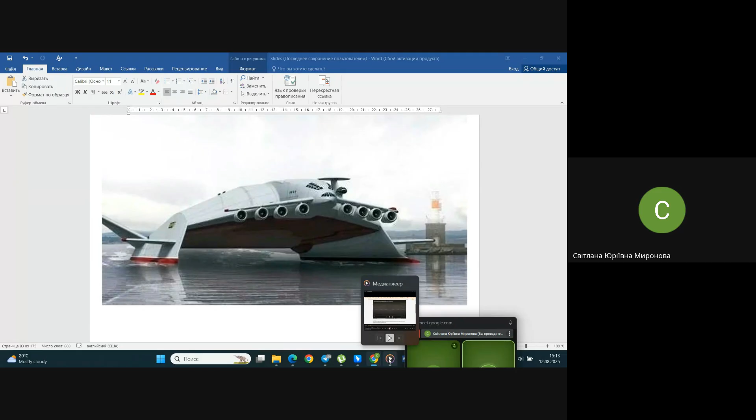That will be the video about an event in America. This event happened in 2019, 5 years ago approximately. I hope it will work properly, and maybe I need to reduce the sound. I haven't found it with English subtitles, do forgive me. It's a BBC site, and I didn't know how to copy this video, so I just saved the screen altogether.

What do we see right now? It's called Stratolaunch airplane. You see a twin body airplane with 6 engines, normal twin fuselages it seems, but a very long center wing, a very long place between these twin fuselages.

What is weird - maybe it's made on some purpose. And what they do in this video is compare it with the Mriya. Mriya is the Antonov 225 airplane. Remind you, by now it's already almost 3.5 years that it does not exist, because the only copy was destroyed not far from Kiev. It was produced in the Soviet Union in 1.5 amount, let's say - because one was produced and been in use, but another one was about to finish when the Soviet Union disappeared, and after this the project was continued sometimes. Ukraine tried to finish this airplane, but really it wasn't finished.

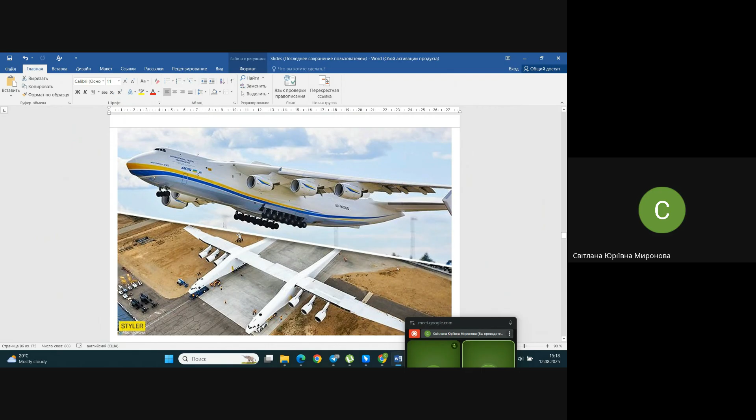Also, that is an American project, you understand - that is a Soviet project, that is an American project. And also I met sometimes one interesting concept, rather similar to Mriya, but it's not Mriya. It's the American C5 Galaxy twin body, and now it becomes obvious why they need this wide span, wide center wing between two bodies, between two fuselages.

Moreover, if we try to find something on the internet like C5 twin body - do forgive me, where is it? Here is, maybe.

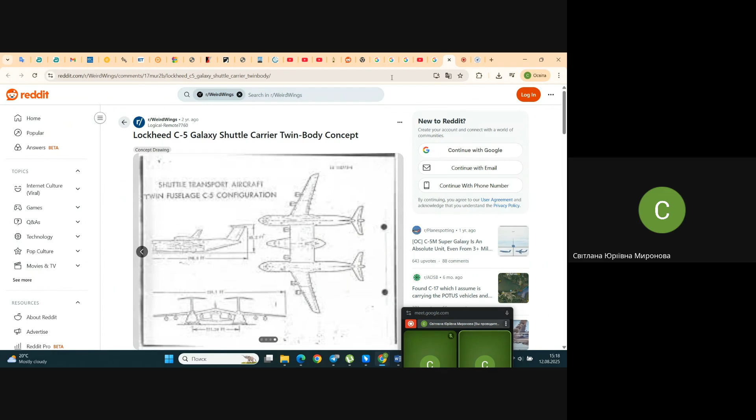Yes, C5 twin body. We will meet not only this concept. It appeared that Lockheed has developed some concepts, and one of these was rather similar to Mria. None of them was realized, and now it's obvious what they were meant to be used for.

Actually, such airplanes, such heavy machines, are necessary not even for transportation of cargoes. They are considered at times like flying airfields, and of course for their capacity to carry high values of cargo, because they are high-lifting airplanes.

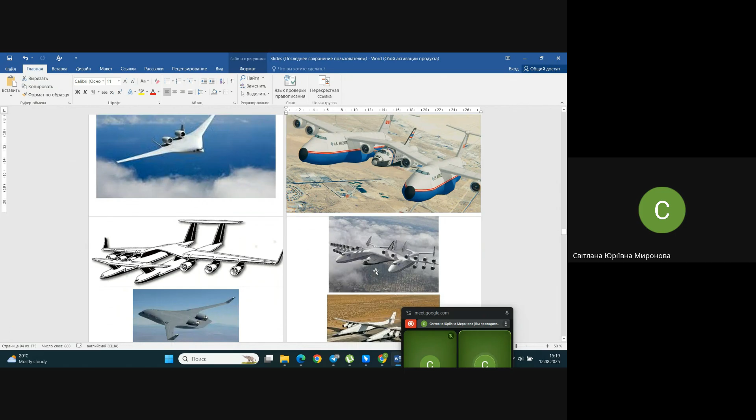Once again, the Mria project was realized in the Soviet Union. About 20 years later, the Stratolaunch was realized. To be frank, each time I watch the Stratolaunch airplane I have the feeling I've seen it already somewhere. I found this when I was watching it for the first time, 5 or 6 years ago.

In our old textbook, I found it. What do you see at the top? Look at this, look at that. It's not the same, certainly, because this one has a tandem stabilizer. It's not quite the same appearance of fuselage. It's another project. But what is this project?

Actually, that is the project from 20 years before Stratolaunch. It's called Molnia 1000, or Heracle, or Hercules in Greek and Latin — not transcription, but translation. Greek to Latin, Hercules and Heracle are the same mythological hero. And Molnia means lightning in our language.

This project, very similar to the Stratolaunch spaceship, was also designed for transportation of heavy vehicles. What you see on this side is not realistic at all — it's neither our Heracle nor the American Galaxy twin body. It's something unbelievable, with a good dozen engines.

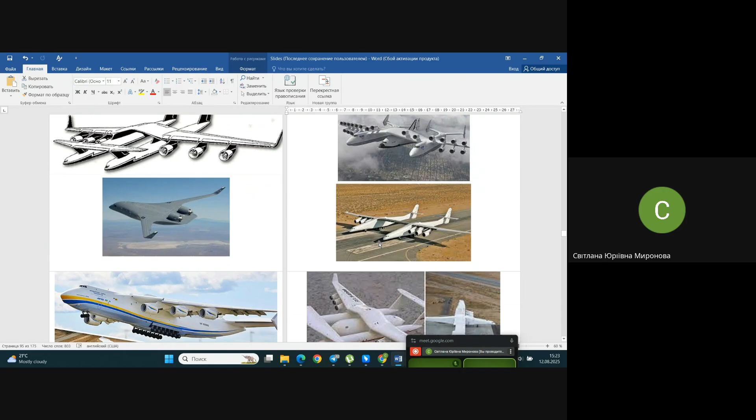And now these fantastic structures come into reality, you understand. Well, let's see what we have next.

Actually, I should say that this idea of launching, or rather of transporting other air vehicles to the place of their work or to the place of their launch, is not a new idea. Let me show you that.

It's from the period of our Great Patriotic War, as we call it, or the Second World War, from 1941 to 1945. This project existed. What do you see here? You see a big bomber in the middle, and five airplanes attached over the wing, under the wing, and even under the fuselage.

They are called parasite fighters. That was one of the first projects where another airplane would transport little airplanes, like fighters for instance, to their place of work. In case the range of the fighters was little, they could only go to the place they were going to work, and couldn't come back.

Or not necessarily fighters — there may be little bombers also. That big one is a strategic bomber, and those are so-called front bombers. As little ones, they are not able to come back after fulfilling the task.

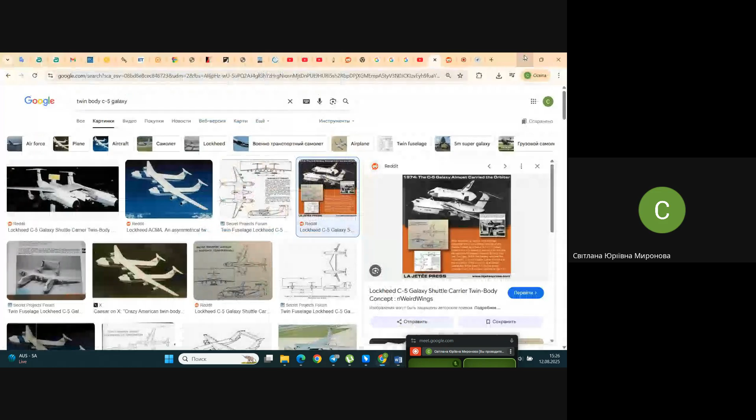But in our literature, it's usually called the flying circus — the flying circus of Vakhmistrov, the family name of the commander of this group of airplanes, of this aviation detachment. So the idea is not new, and after the parasite fighters, some airplanes able to carry parasite planes were further developed.

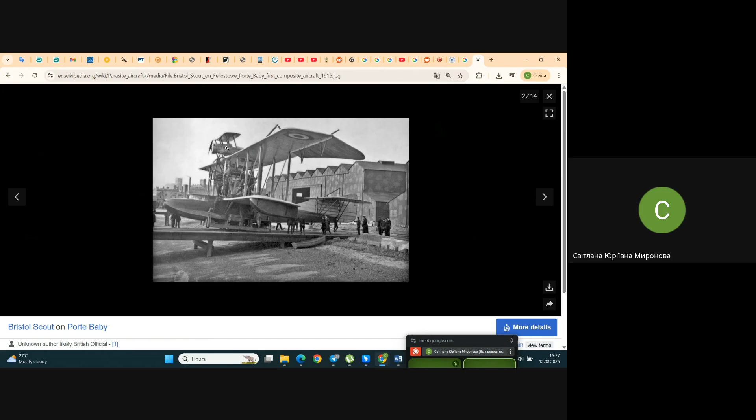Sorry, you see what I've been explaining about Soviet airplane, TB3, Zveno. TB is heavy bomber, if you translate this abbreviation to English. And another parasite fighters, they are from America. Parasite aircraft, what you see, different, even before our flying circus someone else proposed the same decision. As you might see, big airplane as flying boat, and at the top of them is another airplane, parasite, so-called.

Let's come back to slides for a while. Once again, I already showed you in another set of slides in our previous classes. You have seen that picture, I hope you remember it well. This picture is Ekranoplan. I said our former country, Soviet Union, had priority in developing such devices, at least it looks like this. Due to this, this Slavonic name came to the English language and became the name of the whole class of airplanes, whether airplanes or not, it's a question. Let's try to see. Now in English you may meet it with other designations, abbreviations: ground effect vehicle, GEV, and WIG, wing in ground effect, something like this.

Wait a second. Don't know how to, forgive me, how to steal it. Was not able to do it. And what you see, this GEV and WIG and ground effect.

A short video to you, literally a couple of minutes. I even increased the sound, maybe you will hear it.

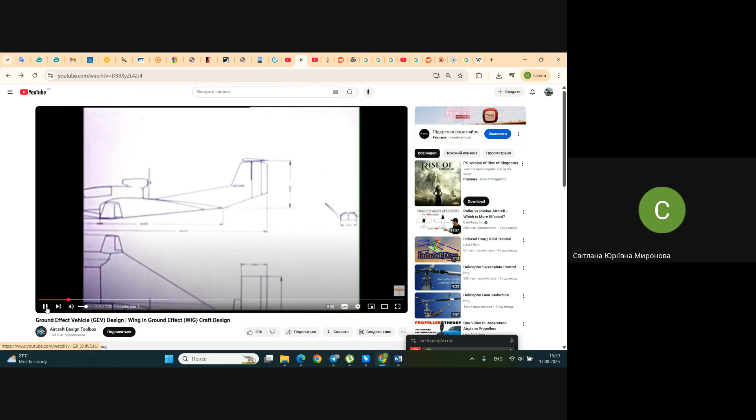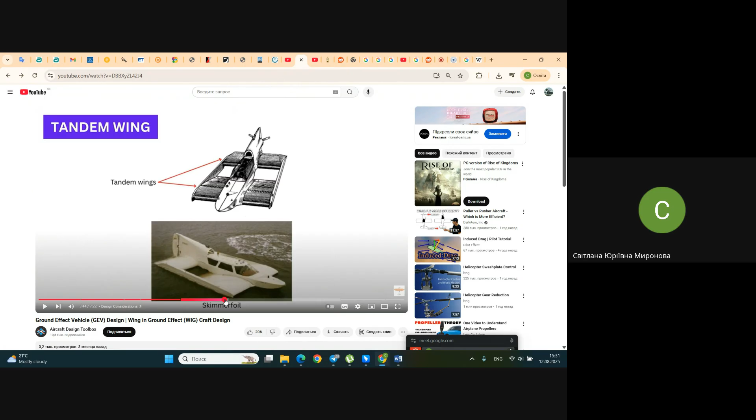No, we will not discuss that certainly, I mean only to show you some animation, let it be, and some popular scheme by means of this video, to show you the most famous, let's say, Ekranoplane here. It's Ekranoplane, you see, Caspian Monster. It was called Caspian Monster by the name of Caspian Sea in Soviet Union, and this creature was spotted, it was watched in photos from NATO, North Atlantic, spying satellites, let's call it like this. They made some snaps, some photos, and these photos were sent to appropriate places in their country, and the whole Ministry of Defense in America was terrified what these crazy Russians had invented, because it was not clear. It was of huge size, looked like an airplane, but was of huge size, and obviously it was something dreadful. This one we see is rather little, pleasant, and doesn't look dangerous actually.

Oh, not that one. Where did I leave that video that I meant to show you? Ah, here it is. I downloaded it on TikTok and I'm going to use TikTok. That one. But in this case, I will remove the sound.

Sorry, now you see, do imagine that from satellite something like this was spotted. And certainly this is not the Caspian Monster, it's another one. It's the last of this battle Ekranoplanes. You see the launch of a missile, and this missile maybe even with a nuclear warhead. Do imagine the terrified people who watch something like this of huge size, and it's not clear how the enemies, because Russians, Soviet Union, Russians for America were enemies, and it was not clear how they were going to use it. Now we see, no, it's Ustinov, we don't see the designer of these machines.

These machines were not created by Bartini. They were created in another design bureau, one actually involved and dealt with creating sea vessels. In modern understanding, those airplanes that were designed are something intermediate really between airplane and ship. And despite their similarity to airplane, they do not fly high. I already said sometimes that they are able to lift high value of cargo, heavy cargos, but only to heights of maybe 9, 15 meters. They do it efficiently over flat surfaces. In this case, they create something like an additional sucking effect, like a sort of air cushion under their wing and blended fuselages, in case they use the blended fuselage scheme. And in this case, they create additional lift due to this not high altitude over the ground.

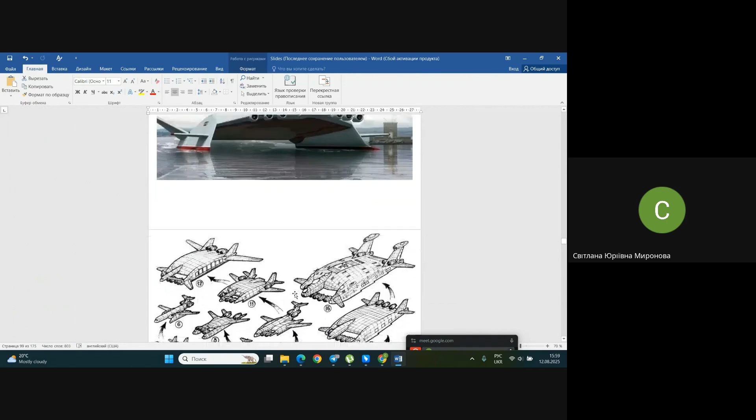Here is the whole theory. Maybe I'll even place it in the slides. I hope, yes. The whole theory of airplanes that he drew, he thought about the development of them. At least the sketches of these developments were found in his table when he died.

He died practically like this, in some days, and he was not much old. No, yes, he was already 77 when he died, because it was 1974, and he was already of a serious age. 77 is not little, rather a long life.

There are sketches made by Bartini of his family of devices he proposed to design. Some of the projects he even completely designed - one of these projects that he completely finished in design, I will show you - but he never succeeded in producing it, because again, of technological problems of that time. He completely finished the design, but it was technologically not possible to produce that airplane.

One of the most interesting and dreadful, as for me, projects is the flying airfield, flying air carrier, and I may try to impress you only with photos and also with some capacities of this airplane. I will try, at least.

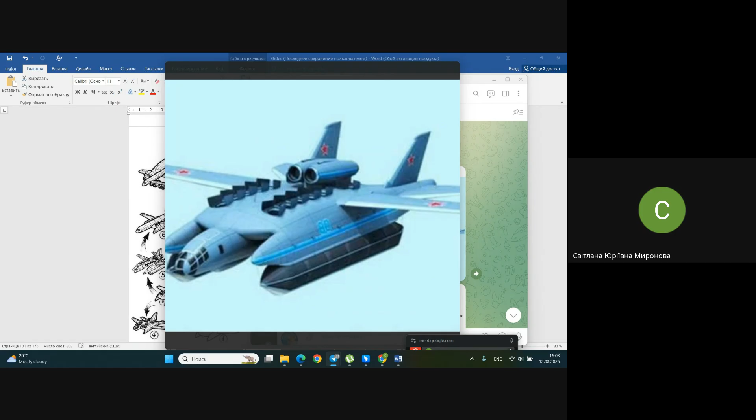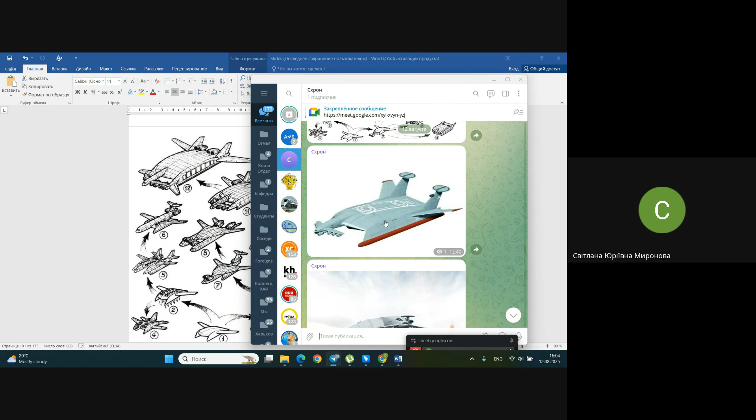Wait a second. Now, this dreadful airplane, I thought I took more photos of them. No, you need to understand that this is the last project of Bartini, that all those things are concepts. What that is, this flying airplane, is a simulating model of how it may look like. Pay attention, here is three things to compare it with.

One of the photos shows comparison with a huge sea vessel. We will see it. Three decks, you see, somewhere near the water line. Three decks and an airfield on the top. I said it was designed, at least the concept was designed, as a flying or floating airfield, in case it's rested on the water somewhere near the coast, like an air carrier, where airplanes are hidden in this huge blended body, supposed to be hidden.

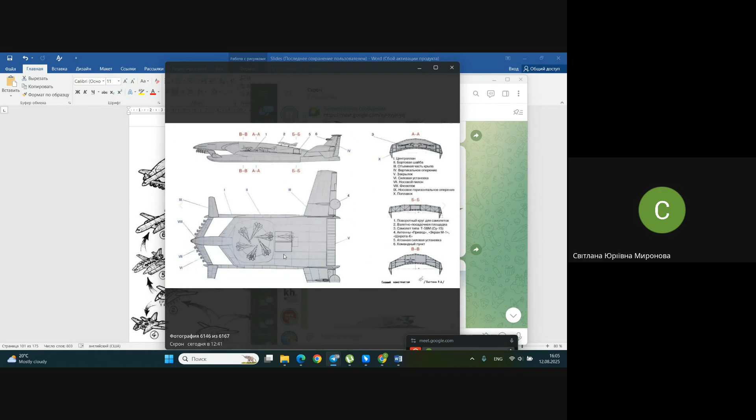Let's see, that is the photo of Bartini himself at his home. Wait a second. No, here it's visible, the concept of placing, hiding of airplanes. And they are not little airplanes, it comes to strategic bombers of that time. Hiding of airplanes inside this blended body.

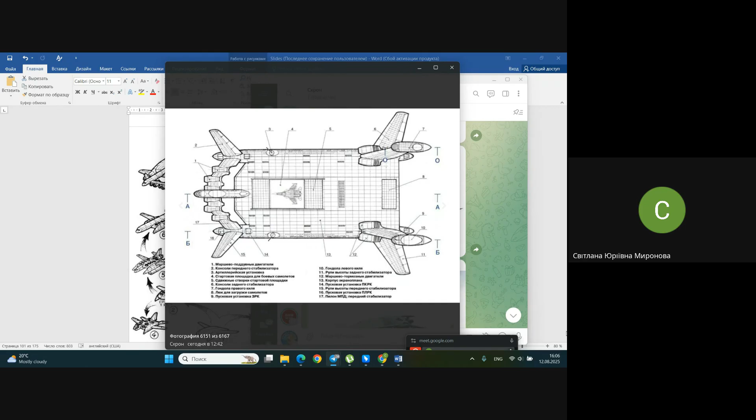Here is the inner arrangement of them. And what did I say about some flying decks? These flying decks are already not with bombers but with fighters.

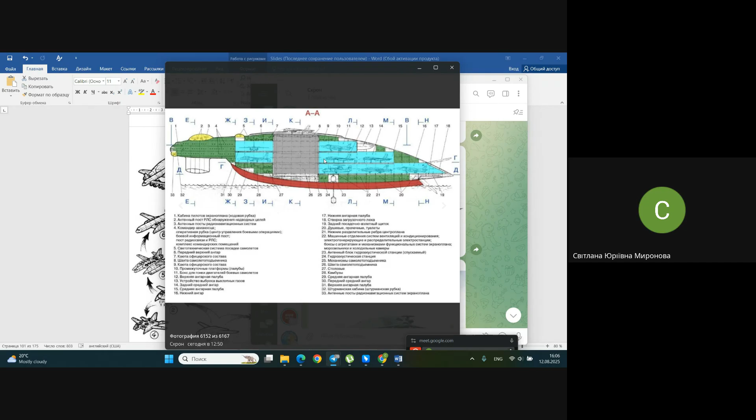So, that one we have seen, and until we're terrified with this information, this was supposed to be a video about the Ekranoplan. And one more interesting work of Bartini I'd also like to show you.

Wait a second, I'd like to say what were the characteristics of it. And for this, I need to refer to one place. Not to this place, certainly. Here is about his... no, Bartini A57. Bartini A57 we will see.

Can't find it right now, where it disappeared. And the cargo, as far as I remember, do you remember what I said? Take your attention, hold it in your memory. The Mria is able to lift 640 tons. The airplane being developed by Bartini, at least as a concept, was not developed as a final design project. That one was able to carry, to lift, 5,000 tons. The heaviest airplane involved now, the most capable airplane involved by now, is almost 10 times less capable than the airplane designed by Bartini, developed in the 60s of the previous century.

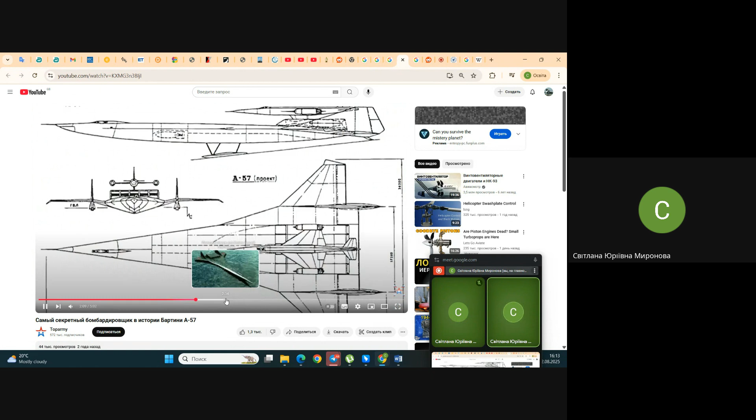Look at what here is. We might see what it looks like. And not much falling to the order of this movie, or much interested in its explanation, because it's about perspective and about how to use it, mostly not about design. And animation, as I said I prepared, wait, it disappeared.

Sorry, no, it's not the one. It's about Lun. Yes, here - Top Secret Soviet Bomber Project. That one. And that one I may even send to you because it was in English.

What here is, it's animation. But do imagine, once again trying to show you what now we see. Of course, it's animation, as I already said, this airplane was never really created. And even so, this airplane was of blended body, it was supersonic, and it was about to use this ground effect also.

And next it will be an explanation of how Americans were afraid of this airplane. No, practically the most interesting thing we have already seen is the animation of flight and general appearance of this airplane. Now you see how it's landing, and you see it's an amphibious plane. It may start and land on the water, and it may start and land on the ground.

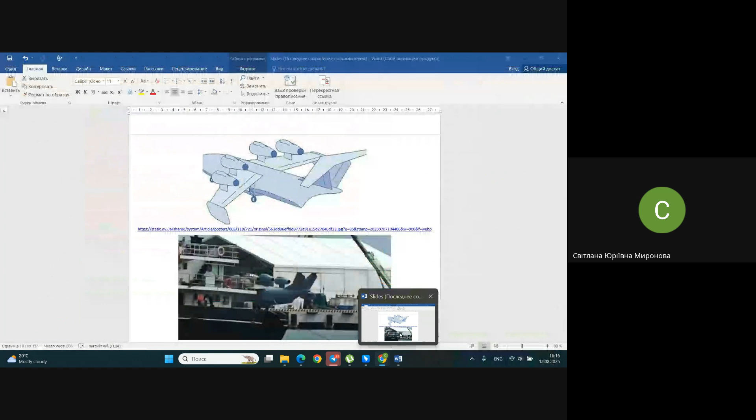It seems like the Chinese airplane I didn't find - I forgot, maybe I took it back, because I found a video about some snaps and some short video about this new Chinese airplane that Western countries have already named. As I said, the computer helped me. It was some videos about a Chinese flying boat of new generation, and it was said that approximately on the ground of that flying boat, China has developed...

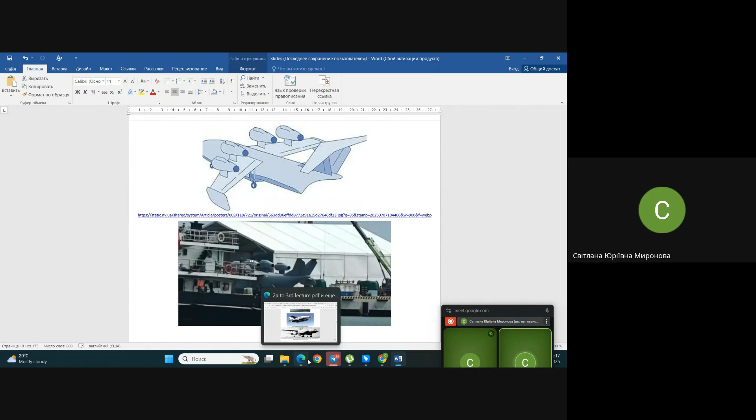It seems China has developed the Ekranoplane of new generation, and this Ekranoplane is, obviously, for military purposes, because more probably it's for lifting heavy cargoes also. In Western countries it's already called either the Chinese Monster, by analogy with the Caspian Monster that we have seen in pictures and video, and the Bohai Monster - something like this. If I pronounce it wrong, do forgive me, it's difficult for us to repeat even sounds of your language because they're two different languages.

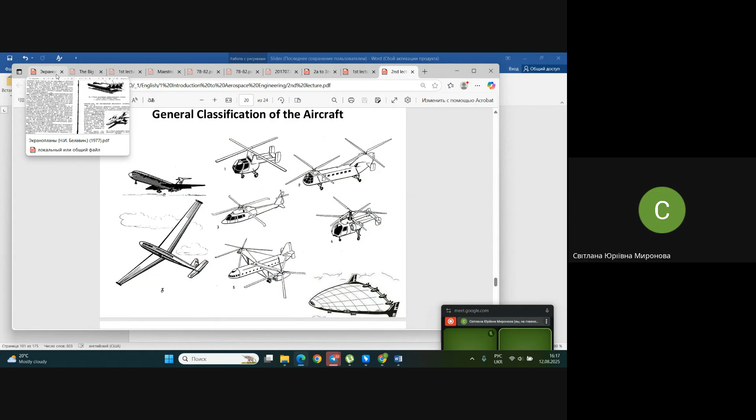And where was that one, yes. And what I did say about the further development of Bartini's work - you already understood that this airplane was flight tested, but never went into operation. It's quite a real structure being used, but not in serial production.